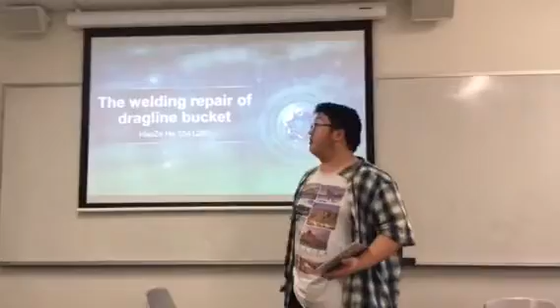Today my topic is about welding repair of dragline bucket.

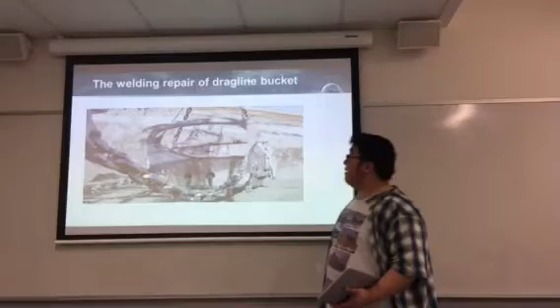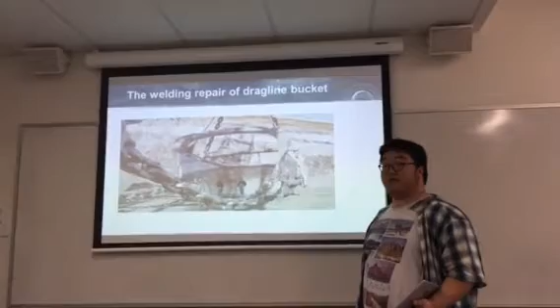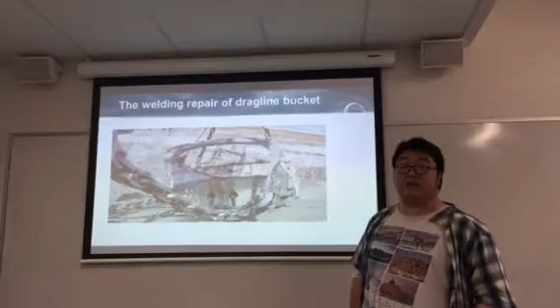Let's see. This is a dragline bucket. As a mining excavator, the dragline bucket is easy to be worn since it has to dig hard metal. You can see that the size of the dragline bucket is so big, which means its cost is high.

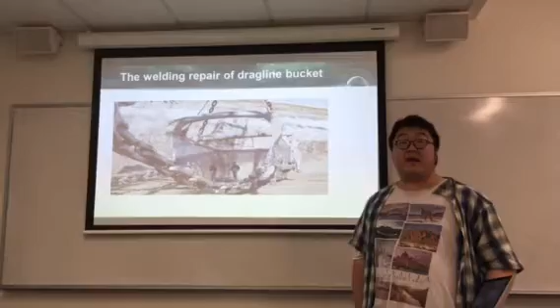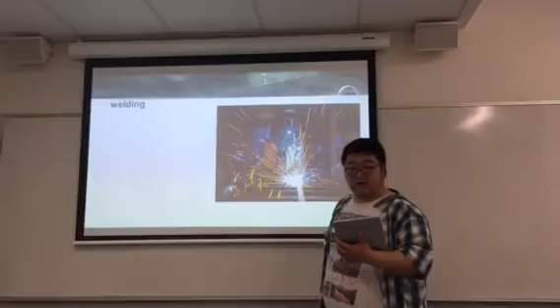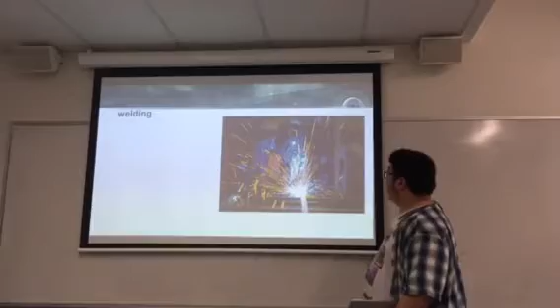So when it comes to repair, once the dragline bucket is worn, most industries will repair it rather than replace it. Welding technique, as an economical practical skill, has thousands of years of development. Nowadays, welding has become the most common way to repair the dragline bucket in the mining field.

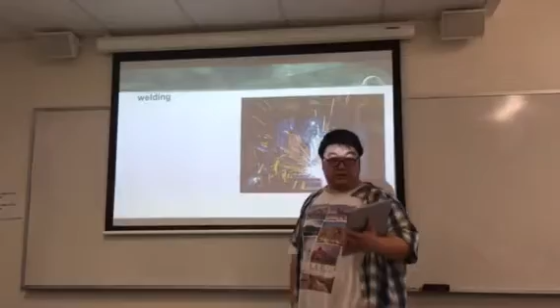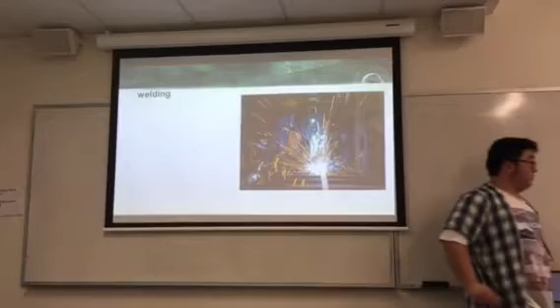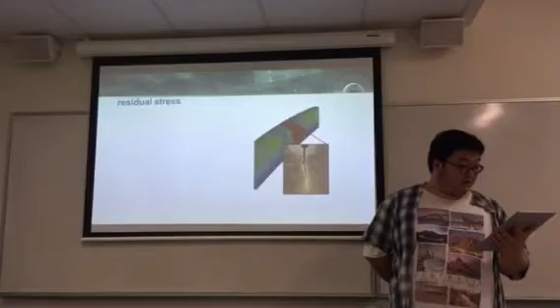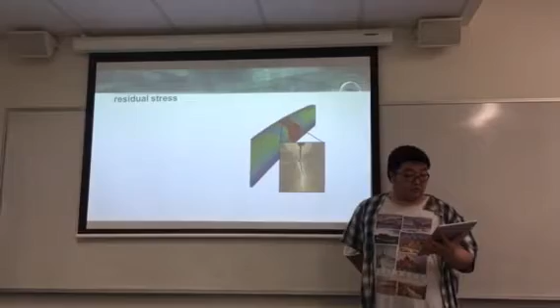However, it doesn't mean there is no issue with welding repair of the dragline bucket. Residual stress is an unavoidable problem of the welding process. The residual stress formed by welding is also a significant problem. The welding process of steel structures, such as ships, bridges, excavators, induces residual stress and distortion which can affect the mechanical properties.

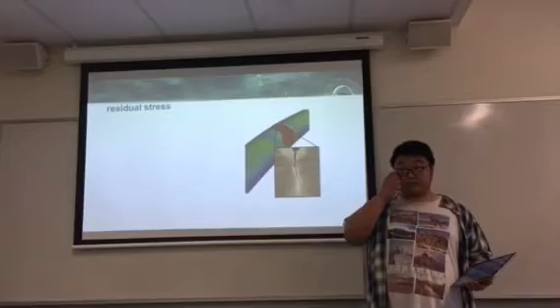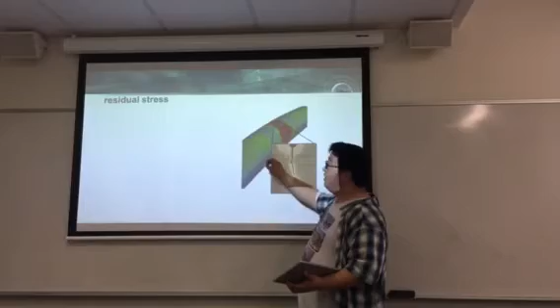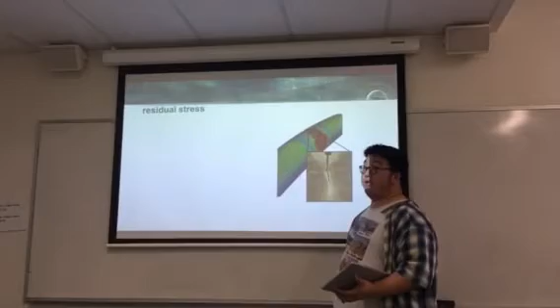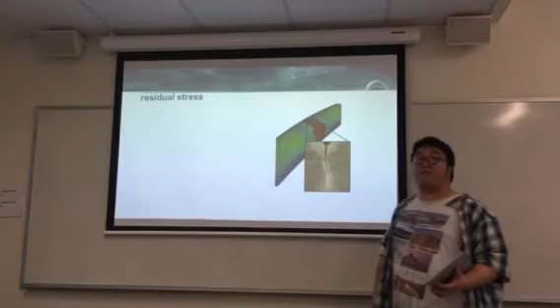The cause of the residual stress is because of unbalanced heat during the area of the structure. Since the size is so large, it cannot be globally heated to repair the welding mass, it can only be locally heated. The unbalanced heat causes unbalanced temperature paths, which is the main reason of the residual stress. It means the problem is unavoidable.

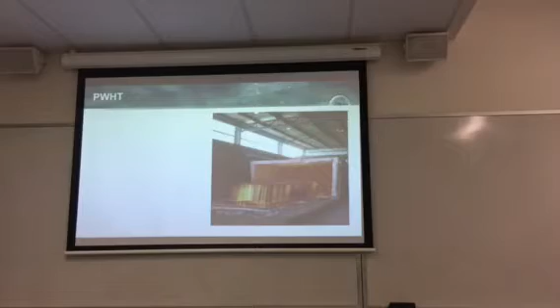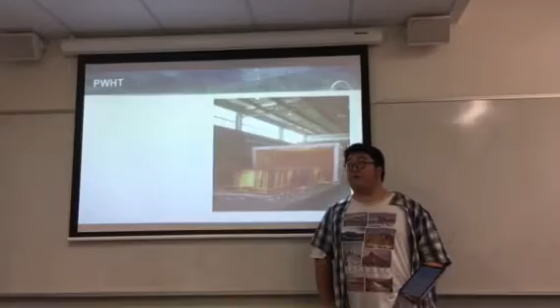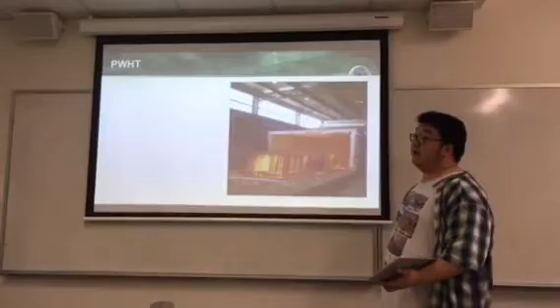PWHT is also called post-welding heat treatment. It is a common way to reduce the effect of residual stress made from welding elements. Besides PWHT, there are many other ways to reduce residual stress, but for large mining tools, post-welding heat treatment is the most common way.

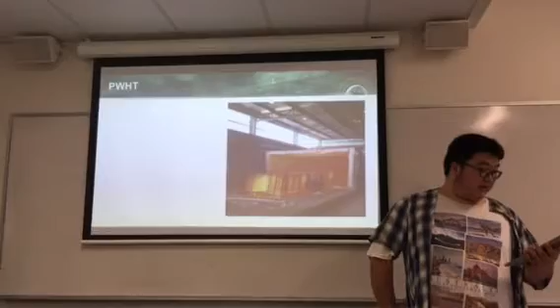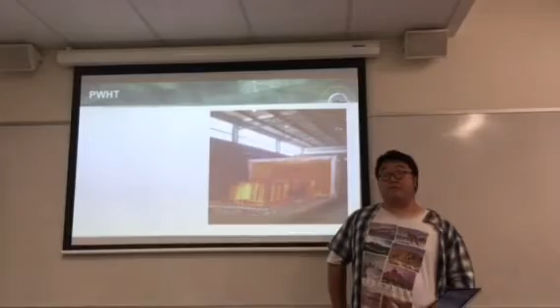PWHT from the microscopic view means slowly heating to a certain temperature, keeping it for enough time, and then cooling at an appropriate speed. The purpose is to improve the mechanical properties and extend the life cycle.

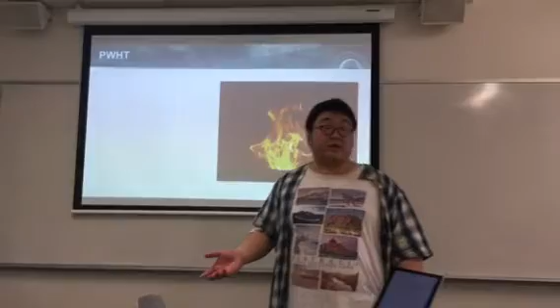While reading the relative literature, I found there is little research about the critical temperature during PWHT. Most industries, according to their experience, choose the critical temperature to reduce the residual stress.

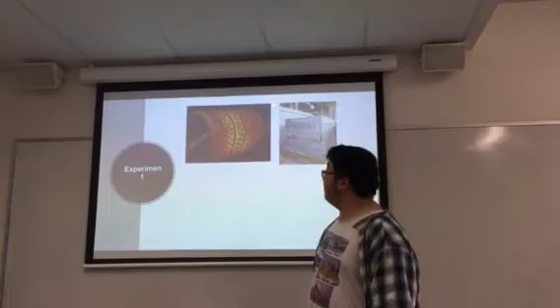In most of the literature I read about simulation experiments on PWHT, the evaluation conditions are not correct, since most experiments use a furnace to heat the weld elements.

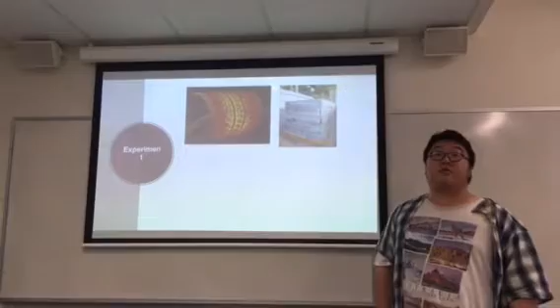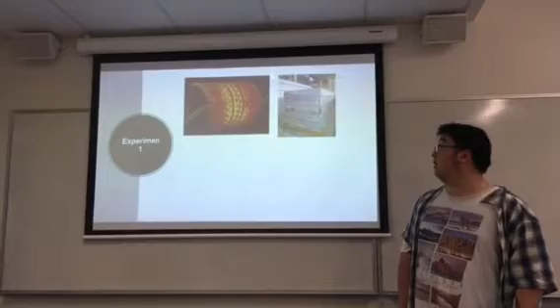In fact, the dragline bucket is heated by local heat since it's too big. There isn't a furnace big enough for the dragline bucket.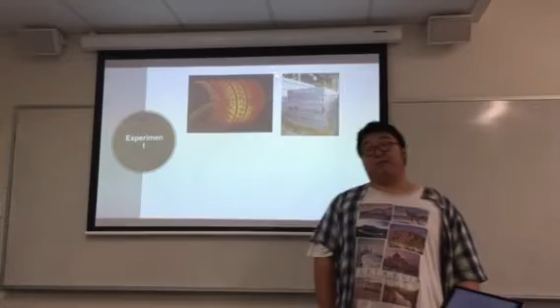Another problem is the material. In the past, high manganese steel was the most common choice for the dragline bucket, but nowadays low alloy and low carbon steel has become the better choice for the bucket.

So for these two factors, I designed a new experiment for the topic. First, the experiment material of the specimen is Q345B steel, with a thickness of 5mm.

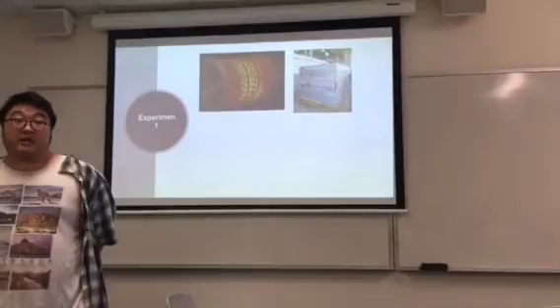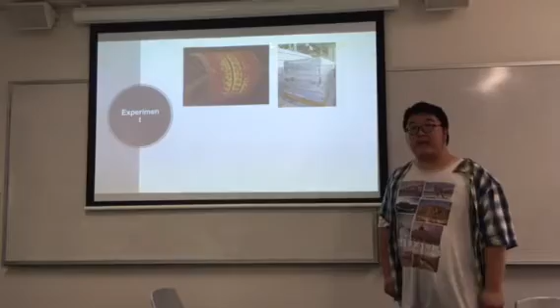Before the PWHT, all of them have to pass tests about yield strength and physical behavior. After the PWHT, all of the properties have to be tested again to compare the results, to find the relationship between the temperature and the effect of PWHT.

On the other hand, digital computer simulation is also used during the experiment. We will use software to simulate the whole process, including preheating, welding, and PWHT. We can compare the two results to raise the accuracy of the experiment.

One of the limitations of the experiment is that it can only research one kind of alloy during the experiment, and the strength of it can give specific data and a formula about the relationship. That's all, thank you.